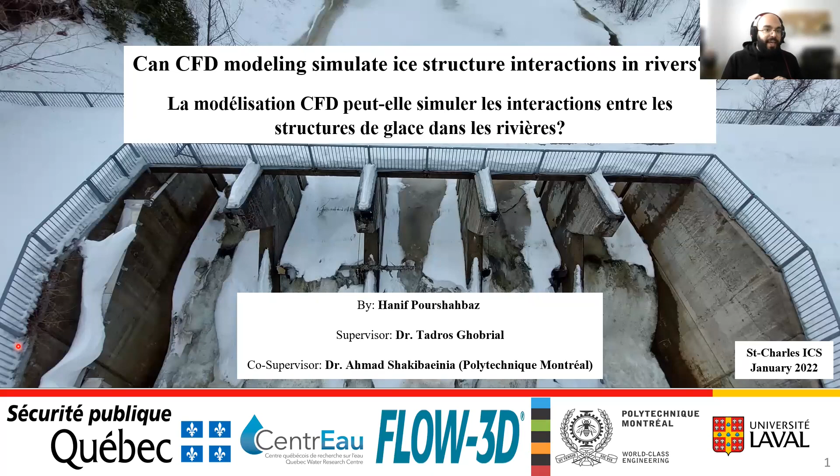Today, I'm going to talk about a question: can CFD modeling simulate the ice structure interactions in the river? Actually, it's a question within a bigger project, my PhD, which is the evaluation of the effectiveness and applicability of ice control structures for flood management. This work is supervised by Dr. Tadros Ghobrial from Université Laval and Dr. Ahmad Shakibaeinia from Polytechnique Montreal.

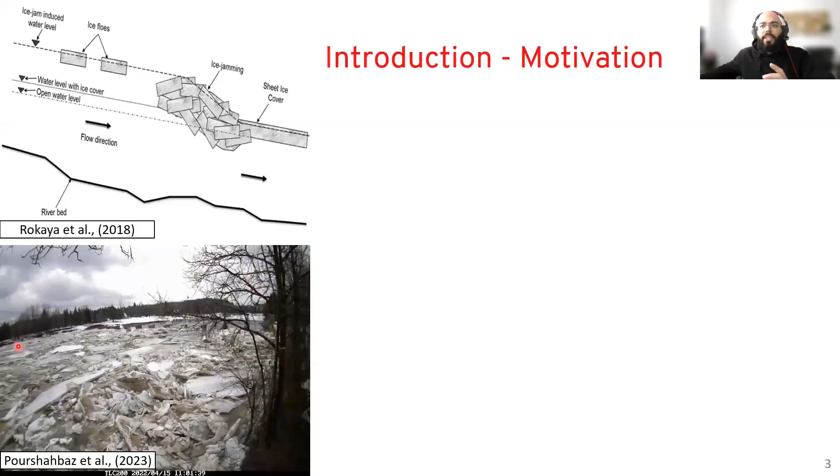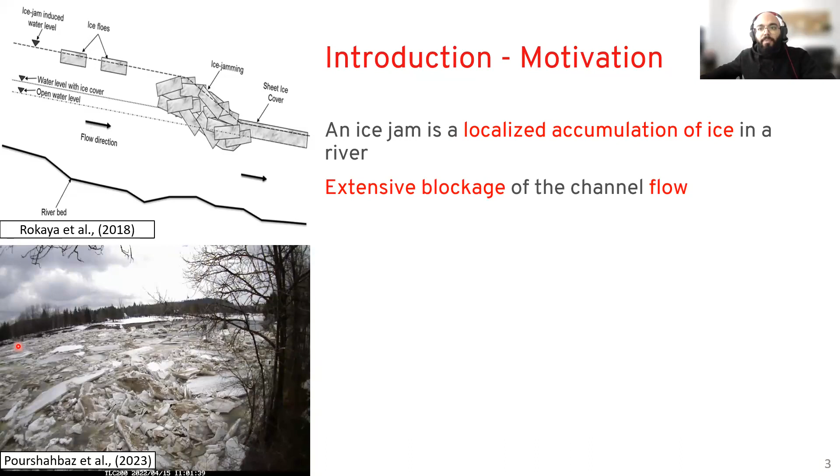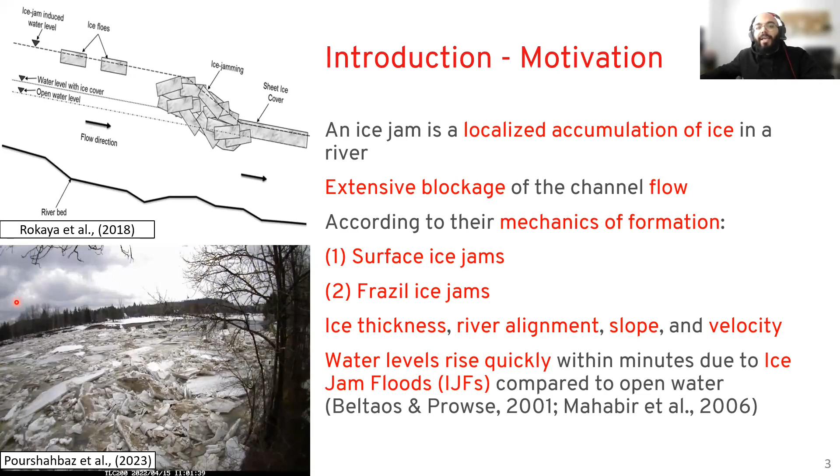Actually, ice thickness, river alignment, slopes, and velocity can all contribute to making an ice jam. As the water level rises quickly compared to normal floods, ice jam floods are actually more dangerous. Any river that can form an ice cover has the potential to have an ice jam.

For example, in Canada, in the Athabasca River in Alberta, we had an ice jam in April 2020. Or in Quebec, where I live right now, in the Chaudière River in April 2019, or in the Sainte-Anne in 2020, we had ice jam floods.

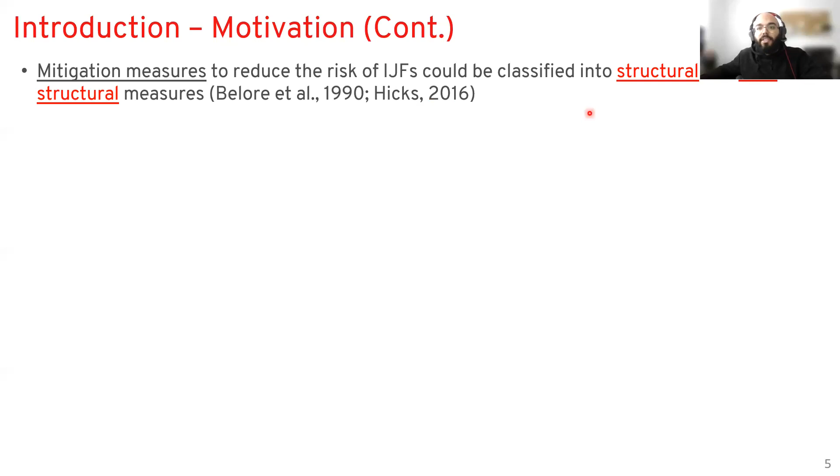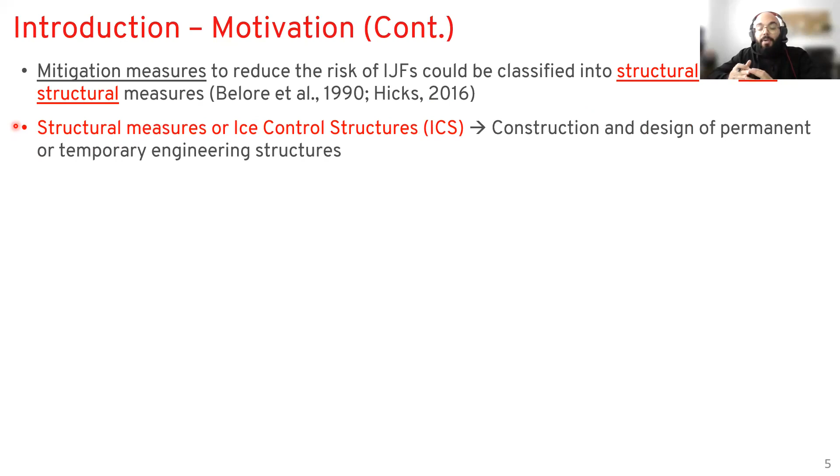So if we want to reduce the damages of ice jam floods, according to Dr. Hicks, we have structural and non-structural measures. Structural measures mean we're going to build an engineering structure on a river.

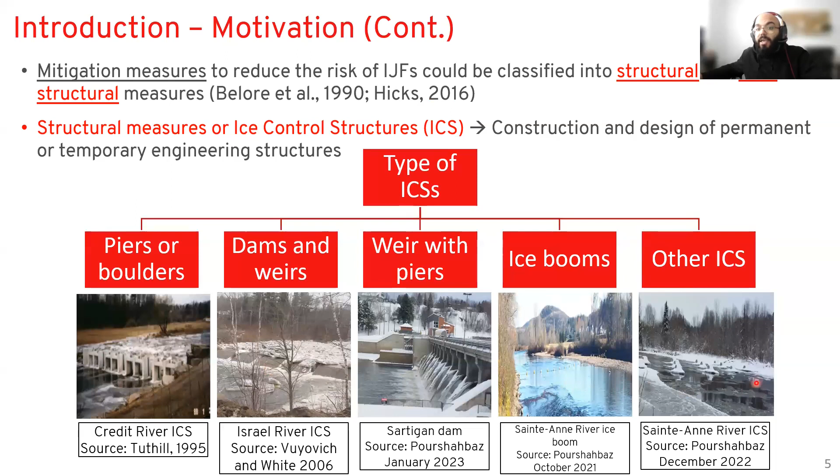We have different types, like piers or boulders, as in the Credit River. We have dams and weirs, like the Israel River. We have weirs and piers, like the Sartigan Dam in Quebec, Saint-Georges. We have ice booms, like in the Sainte-Anne River in Quebec as well. And we have other ice control structures not classified in these categories, like what we have again in the Sainte-Anne River in Quebec.

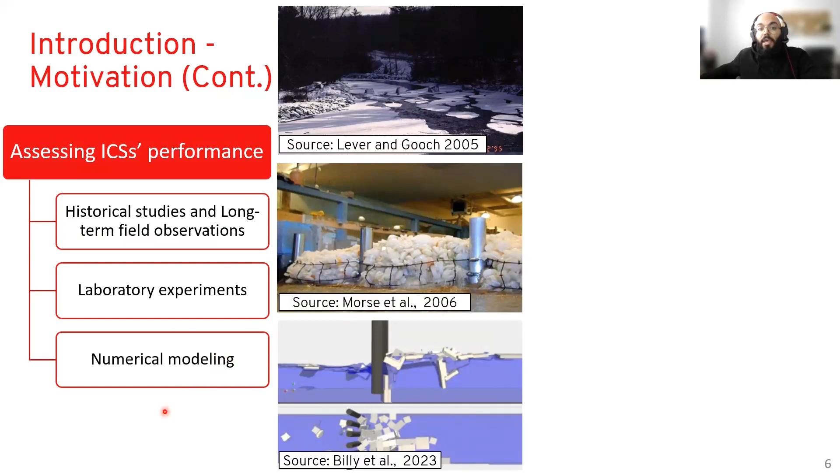So to evaluate whether these ice control structures work correctly, we have three approaches. We have historical study and long-term field observation, like what Lever and Gooch did. We have laboratory experiments, like what Dr. Brian Morse did at Université Laval. Or we have numerical modeling, like Dr. Shakibaeinia's team does at Polytechnique Montreal.

About historical and long-term field observation, we have pros and cons. The pro is that we have real data which we can use to validate our numerical models. But as you know, if you've done any field observation, there are problems with the field because it's dangerous. We can only measure one parameter at a time, accessibility is hard, and we have other problems.

About laboratory experiments, we have very reliable data, but the problem is, as Dr. Shen says, satisfying the scale effect. So what should we do? We go to numerical modeling, but for good numerical modeling we have to combine the advantages of all these methods together.

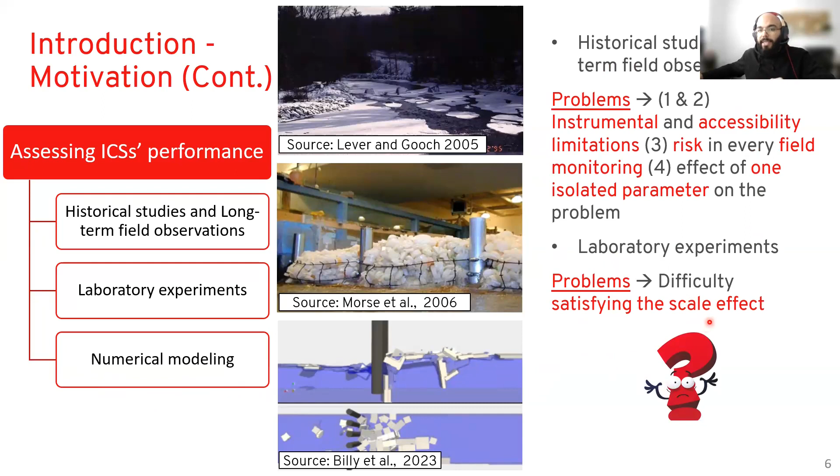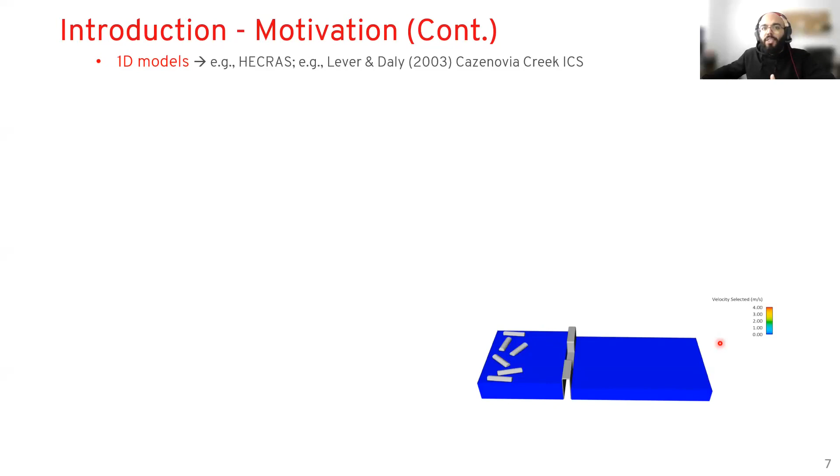So about numerical modeling, we have the 1D model, like HEC-RAS. Most engineers right now use HEC-RAS; it's a 1D model and it works. One of the rarer models is the 2D model, like CRISSP2D, which gives us more data, as Nolin did for a river in Quebec.

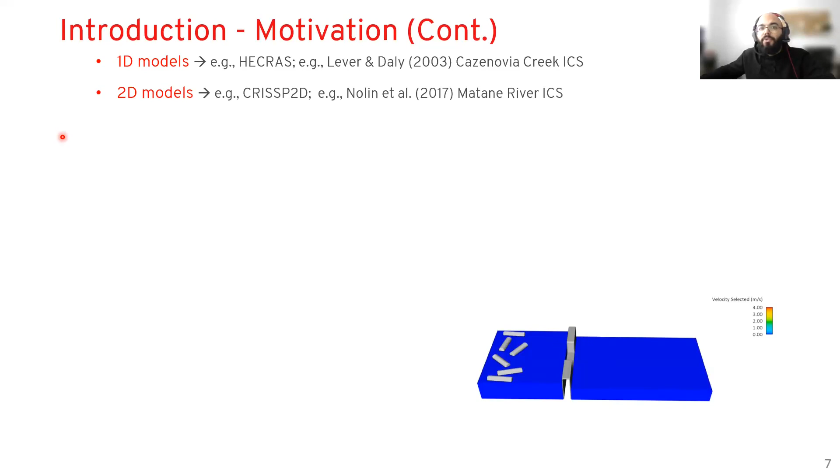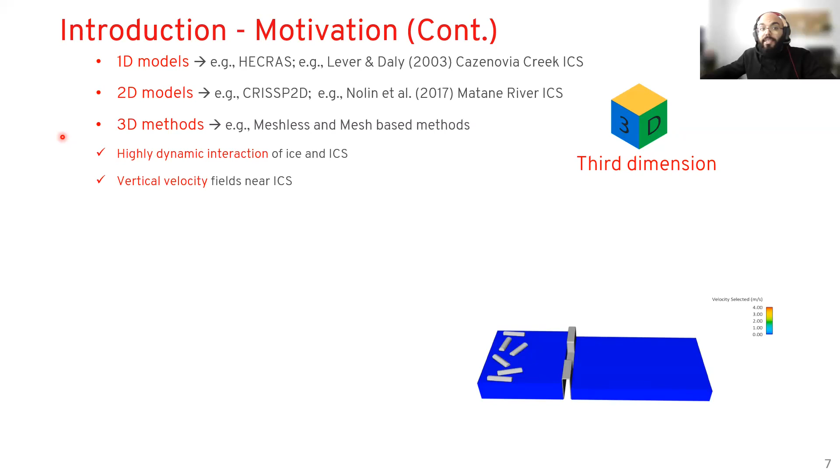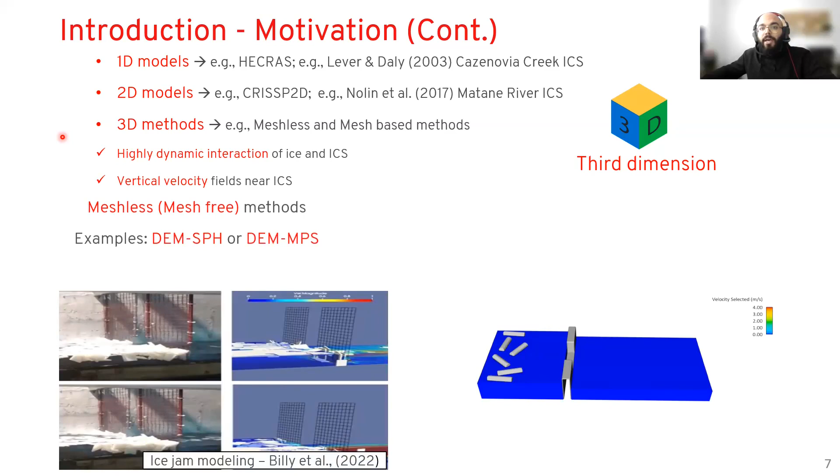For 3D methods, we have meshless or mesh-free methods and mesh-based methods. These help us see the highly dynamic interaction of the ice and the ICS, and the vertical velocities near the ICS. So the question is: should we use a meshless method like DEM-SPH or DEM-MPS, or a mesh-based method like DEM-FVM, finite volume method?

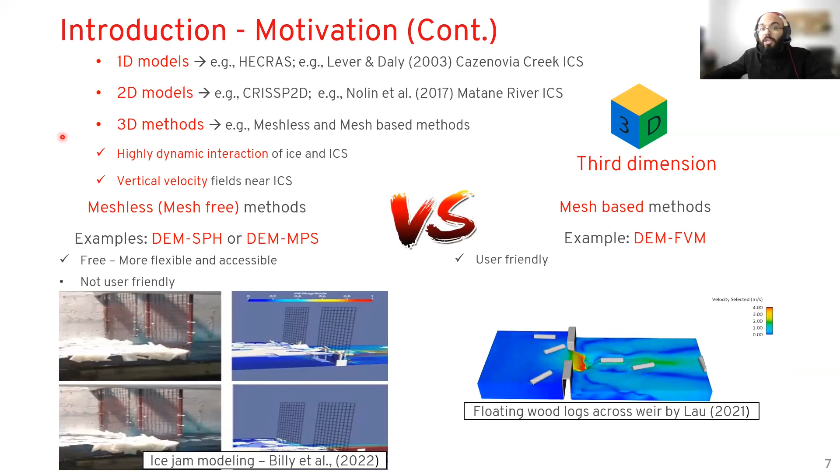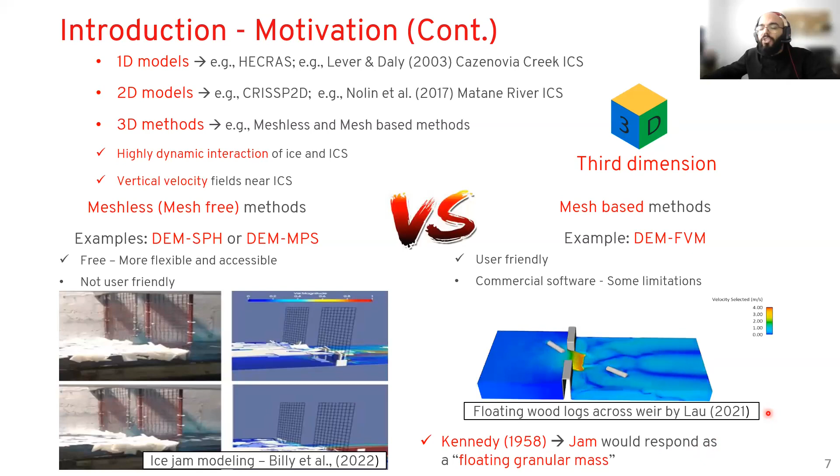The meshless or mesh-free methods are more flexible and accessible, but they are not user-friendly. On the other hand, DEM-FVM, the mesh-based method, is user-friendly, but it's commercial software with some limitations. But when you see a video like that, it reminds you that we can use these models to actually simulate an ice jam with the floating granular mass.

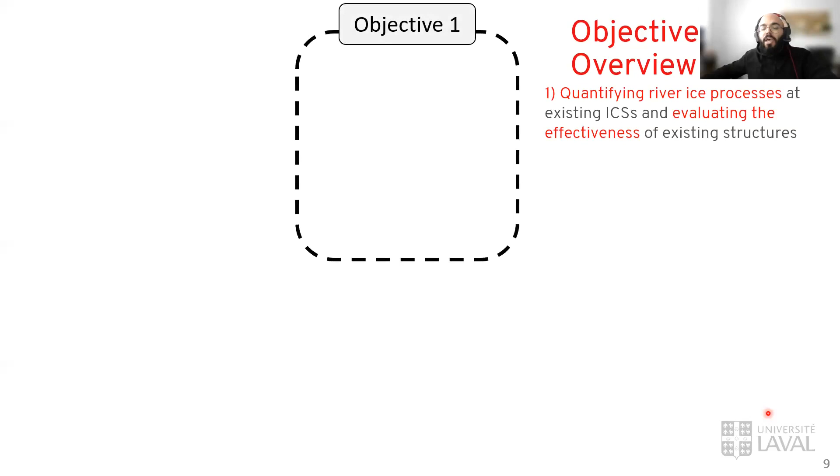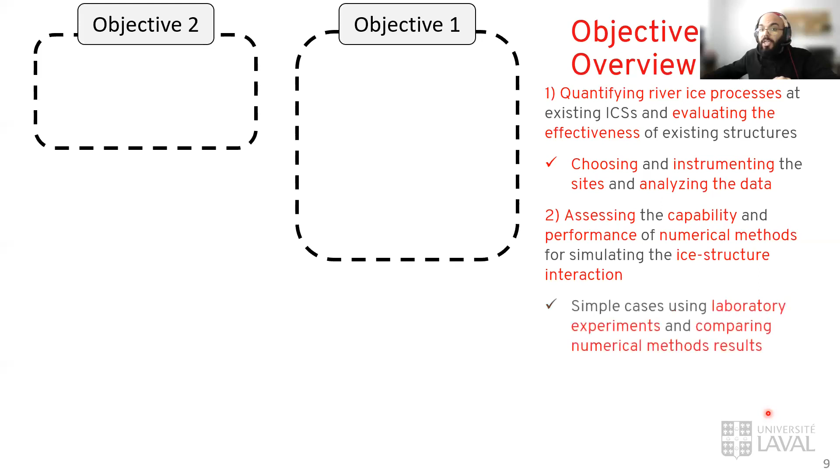So the objective of this presentation - first I'm going to talk about the overall objective of the PhD. In the overall objective, first I have field data, for which I choose instruments and sites. Then I want to talk about the capabilities of numerical methods for simulating the ice structure interaction. And then I want to use the numerical method to optimize the design of the ICSs and maybe introduce new structural measures.

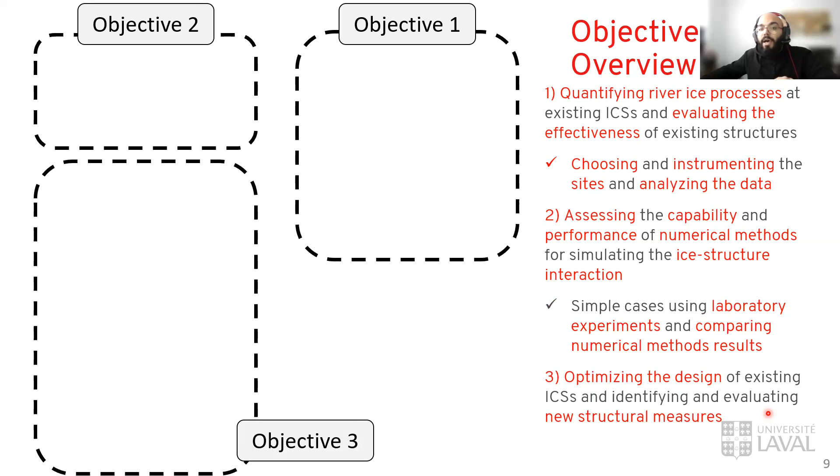So for quantifying the river ice processes, I have field observation 1 and field observation 2, which is winter 2022, 2023.

This is the winter 2021, 2022.

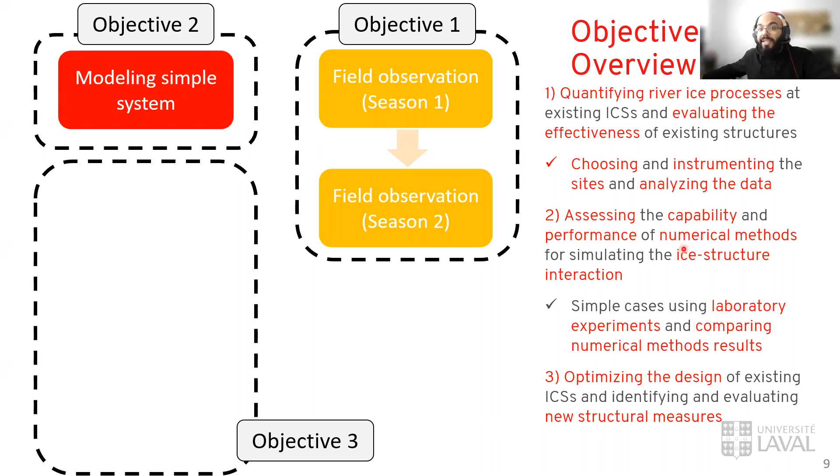We have them modeling the simple systems, where we're assessing the capability of numerical methods and how we're going to connect these together with a calibrated and validated model and the results of the field observation season 2. We're going to use them to model the real life system, then optimize the design and introduce new structural measures. Actually, this part of the project by itself is a master project as well.

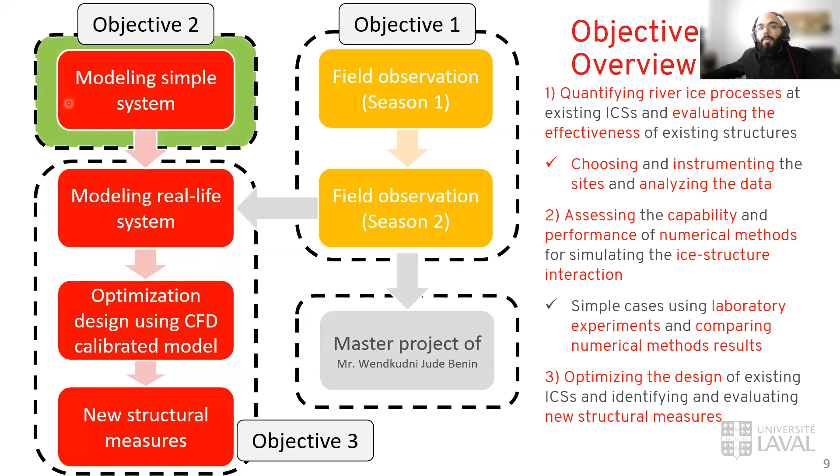In today's presentation, I'm just going to talk about this part of the project, which is modeling the simple system. So I'm going to talk about evaluating a mesh-based method, DEM-FVM, which is actually in FLOW-3D HYDRO, to do the simulation of ice and ice control structures, comparing it with laboratory experiments and other numerical methods.

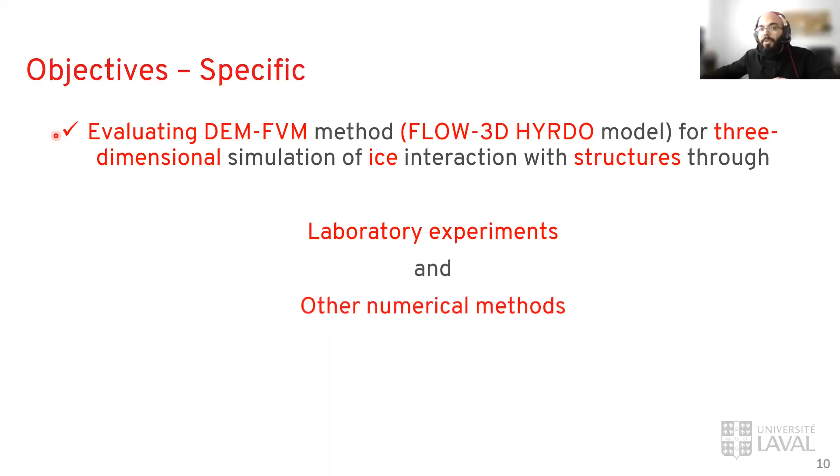For the methodology, as I said, we have the laboratory experiments. The laboratory experiments were actually done at Polytechnique Montreal by Dr. Ahmad Shakibaeinia's team.

In the first laboratory experiment, we have the dam break with 4 and 9 blocks. The blocks are here, the gate opens, these blocks go to the end of the channel, hit the end of the channel, and come back. They have a complex phenomena.

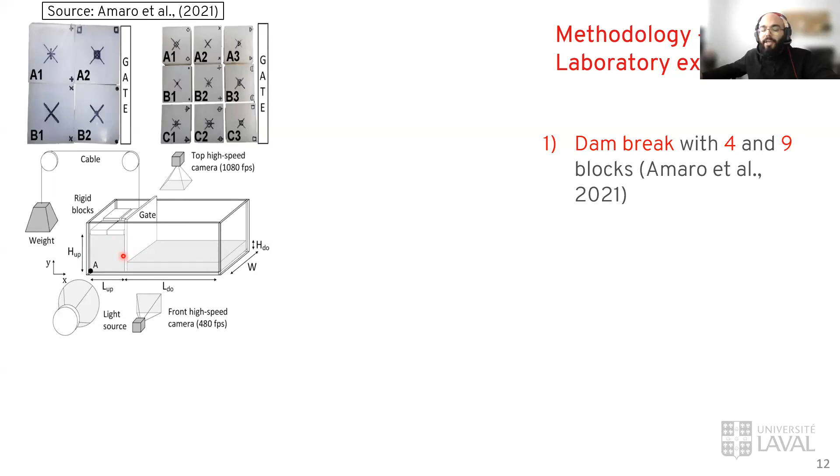Then we add more complex phenomena, which involves 25 blocks, and we add the piers that represent the ice control structures.

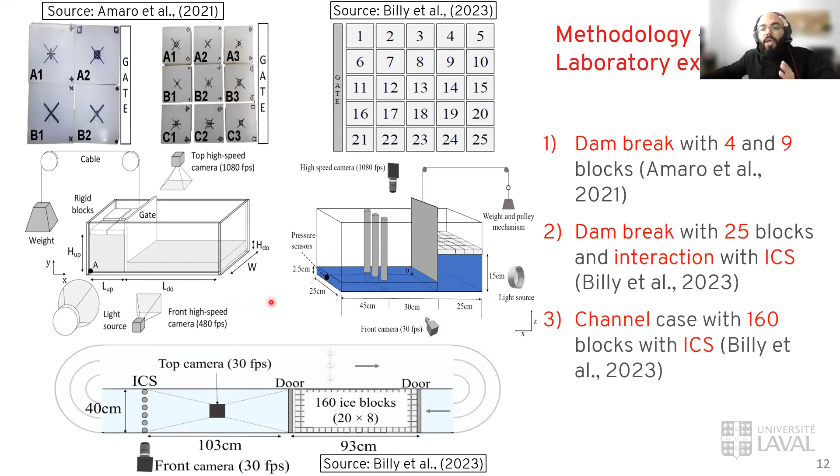Then we add more complexity to the problem. So we bring 160 blocks into a channel along with the ice control structures, which are the piers again. In each step, we try to add more complexity to the problem.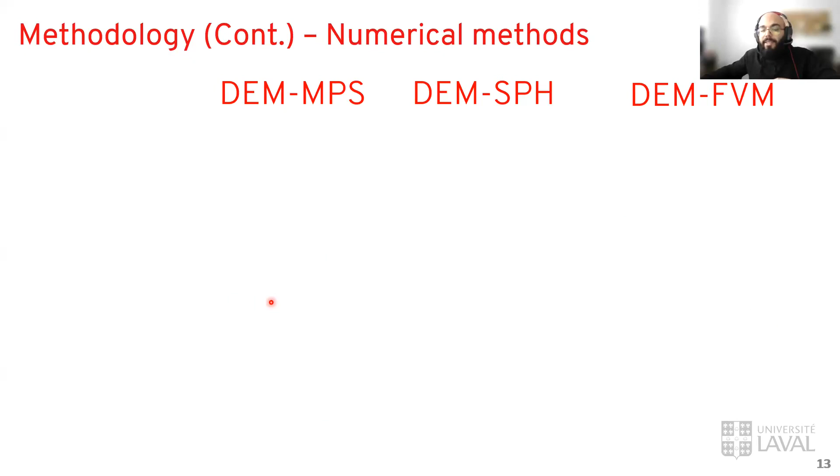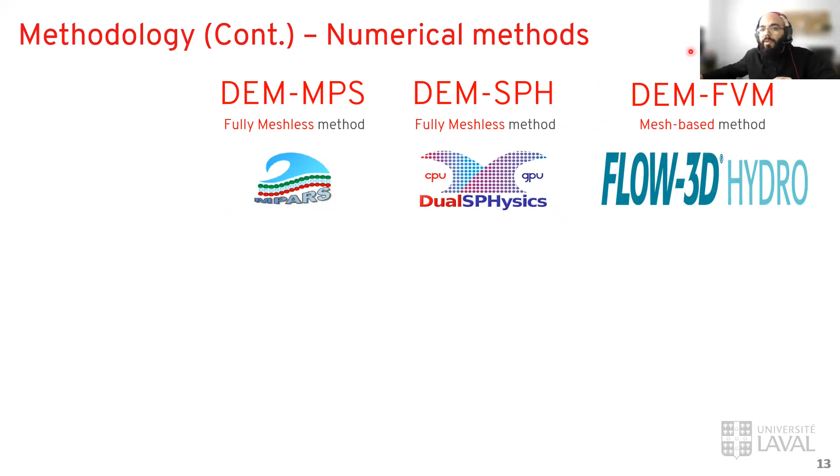For the numerical method, we have DEM-MPS, DEM-SPH, and DEM-FVM. The first two are fully meshless methods, and the other one is the mesh-based method. DEM-MPS is developed by MPARS, DEM-SPH is developed by DualSPHysics, and DEM-FVM is developed by FLOW-3D HYDRO.

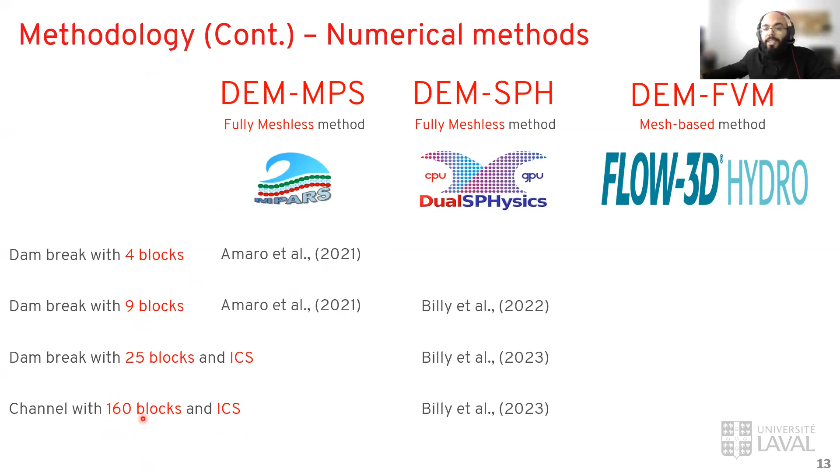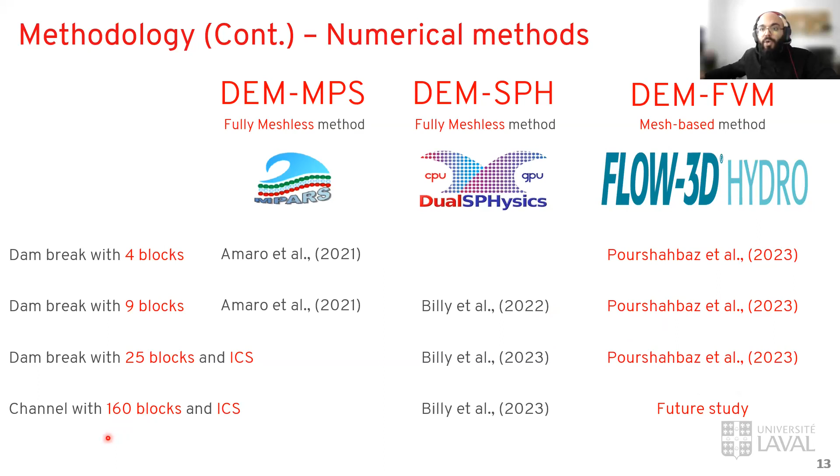So we have these experiments: the dam breaks with 4 and 9 blocks, 25 blocks with ICS, and 160 blocks with ICS. Dr. Shakibaeinia used this method and published a paper in 2021 for the 4 and 9 blocks. Then they moved to using SPH, another meshless method, for the 9 blocks, 25 blocks, and 160 blocks. In my project, I'm using the mesh-based method to make a comparison between the meshless methods, other numerical results, and the laboratory experiments.

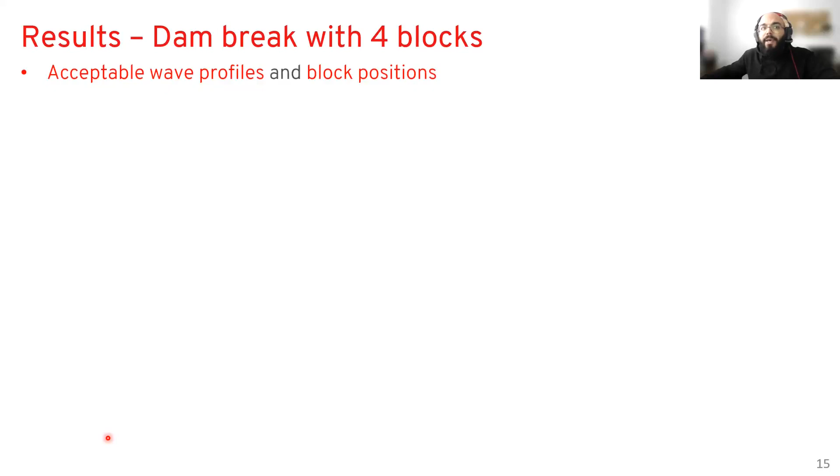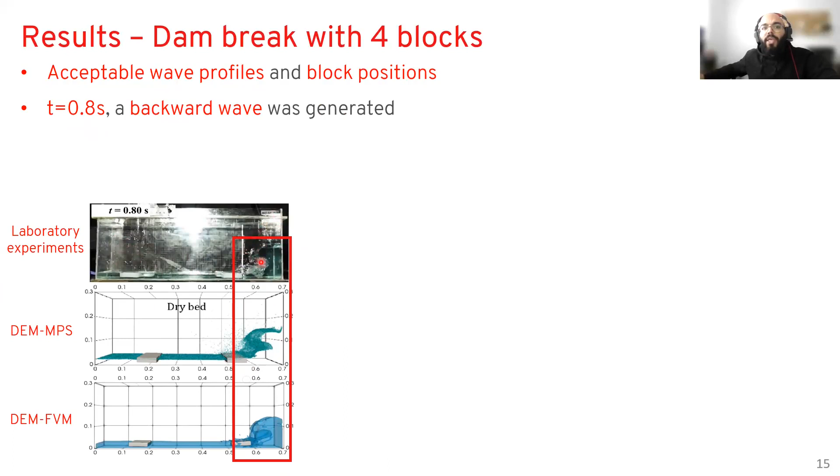So about the results we get from the mesh-based method: first, we have the dam break with 4 blocks. We see that we have an acceptable wave profile and block positioning. For example, at T=0.8 second, we have a backward wave that was generated very well. When the gates open, the water hits the end of the channel and creates a backward wave.

At T=1.6 seconds, we have the reversed wave. So the water hits in here, comes back, and we have a reversed wave that's generated correctly.

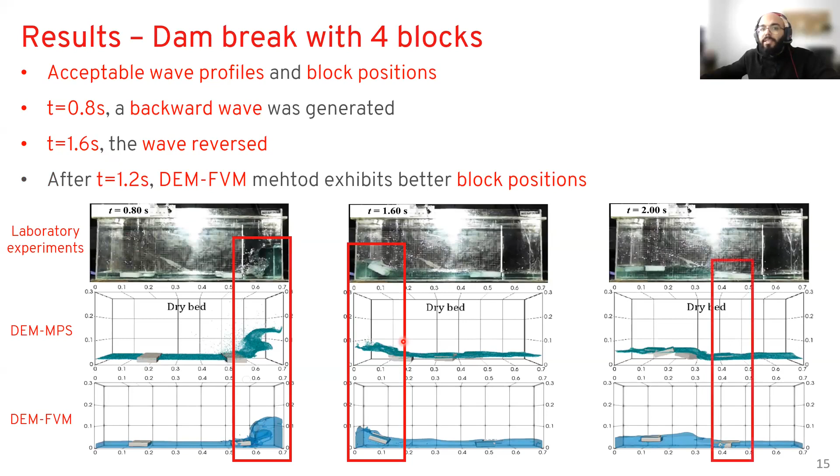But we see that the mesh-based method, DEM-FVM in the FLOW-3D HYDRO model, actually shows better block positioning. One way to see that the numerical method works well in this scenario is to follow the blocks in different directions.

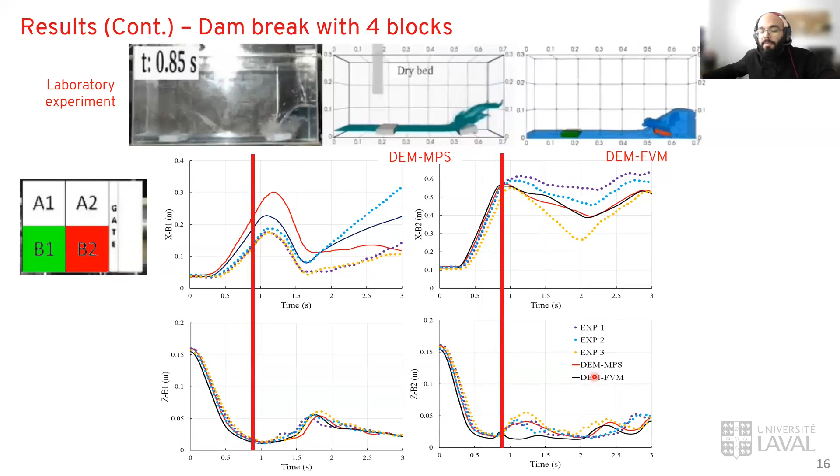Here you can see the three experiments plotted together: the laboratory experiment, the DEM-MPS meshless method, and the DEM-FVM mesh-based method, compared to look at the movement of the blocks against the laboratory experiments and other numerical methods. We see that the profiles of the movement have acceptable results.

And we see that the water surface that is generated also has good results.

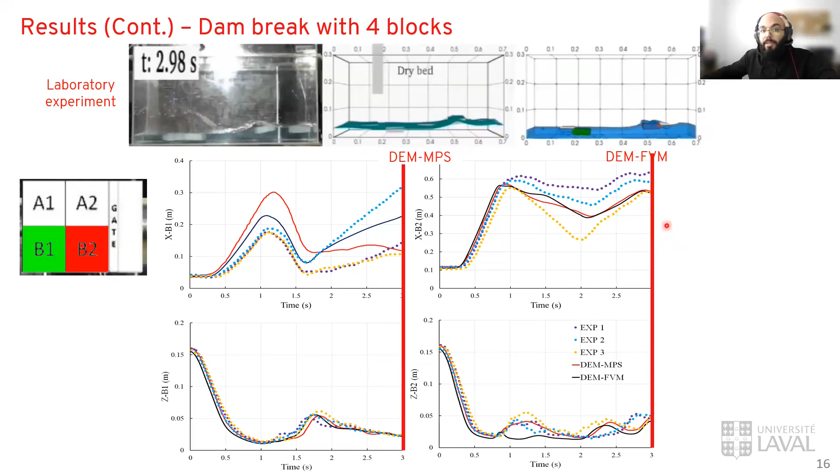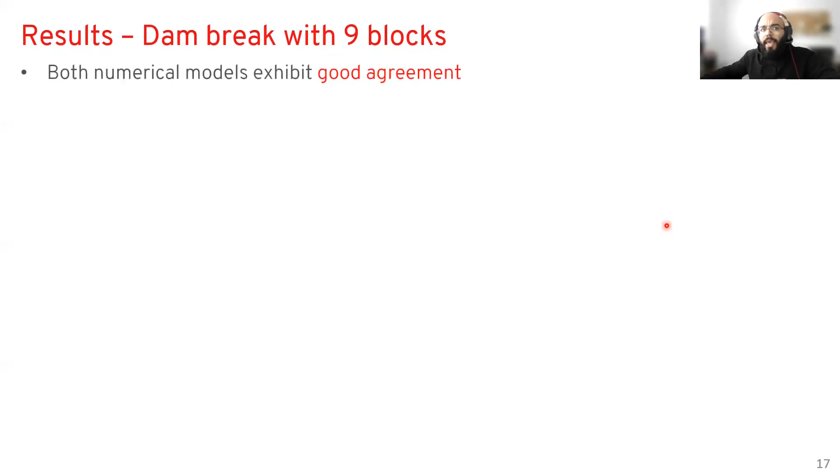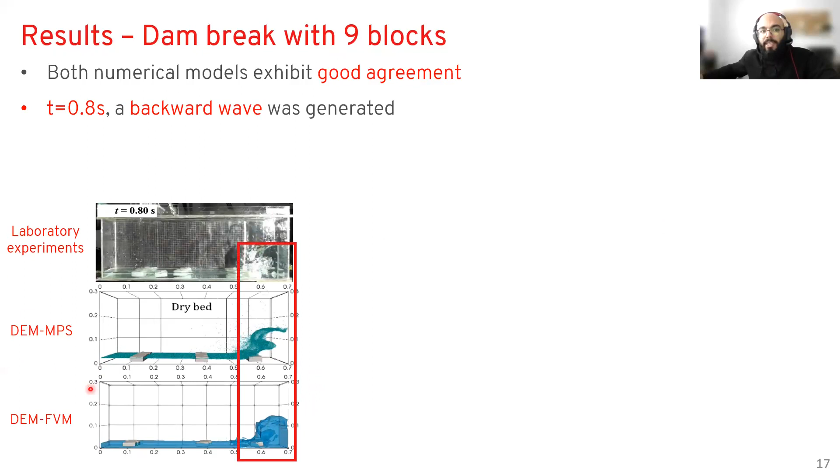So we add more complexity to the problem: we add 9 blocks. Going from 4 blocks to 9 blocks, again we see that the numerical models and methods have good agreement. The backward wave is generated correctly. First we have the laboratory experiment, then the meshless methods, and then the mesh-based method.

Then when this wave hits the water, we have the wave collapse. We see that the wave collapse, shown in the middle images, is generated well.

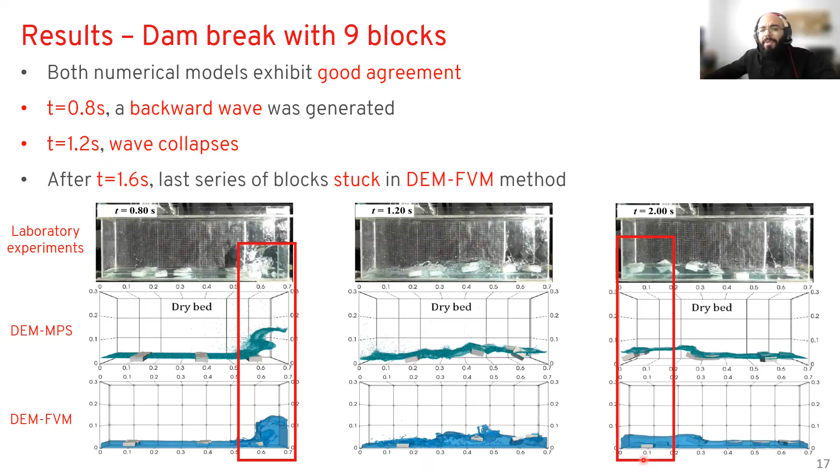After T equals 1.6 seconds, we see that the last blocks in Flow-3D actually got stuck at the bottom of the channel, which may be due to the poor meshing that we used.

We followed the movement of the blocks, C3 and C2, shown in red and green, in the X direction and the Z direction to see if the model works correctly or not.

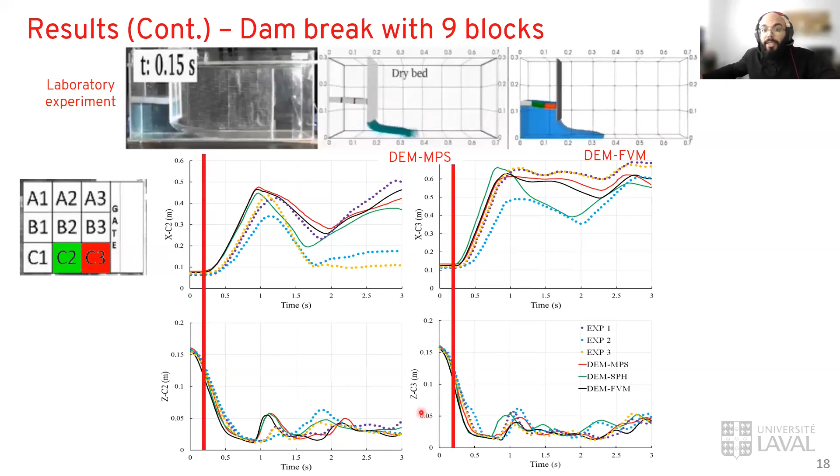Here we have the three experiments again: the dotted line is the meshless method DEM-MPS in red, DEM-SPH in green, and DEM-FVM in black.

One question that may arise is why the laboratory experiments were repeated three times with different data. This is because it's a very complex phenomenon to be sure about the general movement of each block. Actually, the results are very close together.

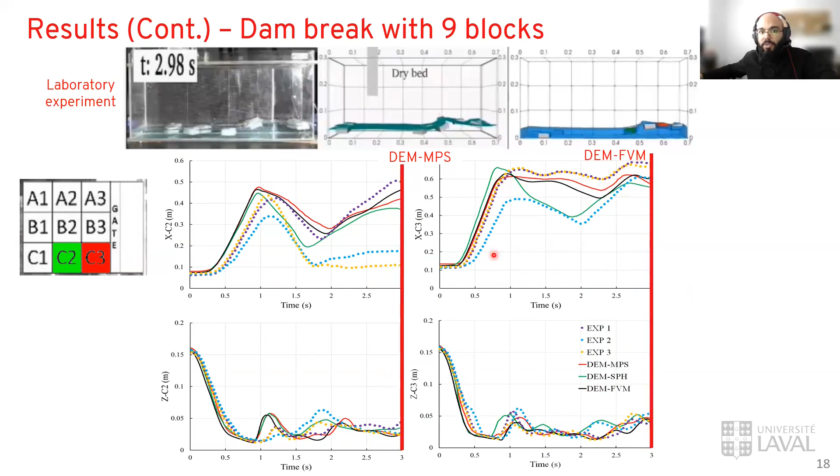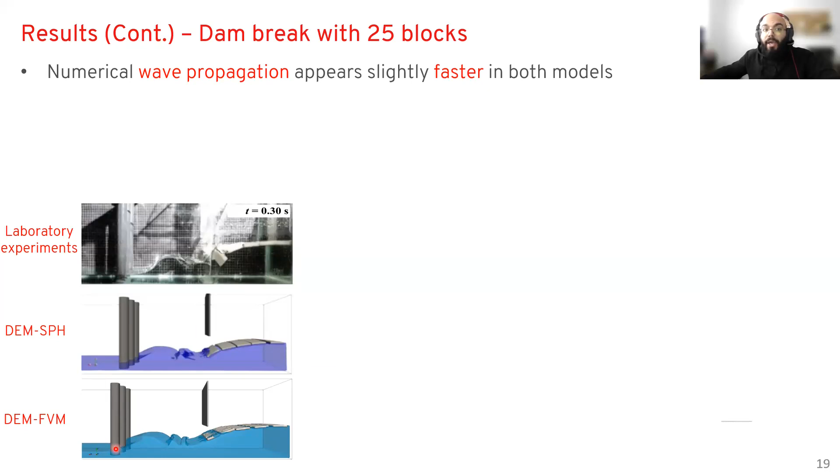We see that the wave generated in the numerical methods was faster than in the laboratory experiments.

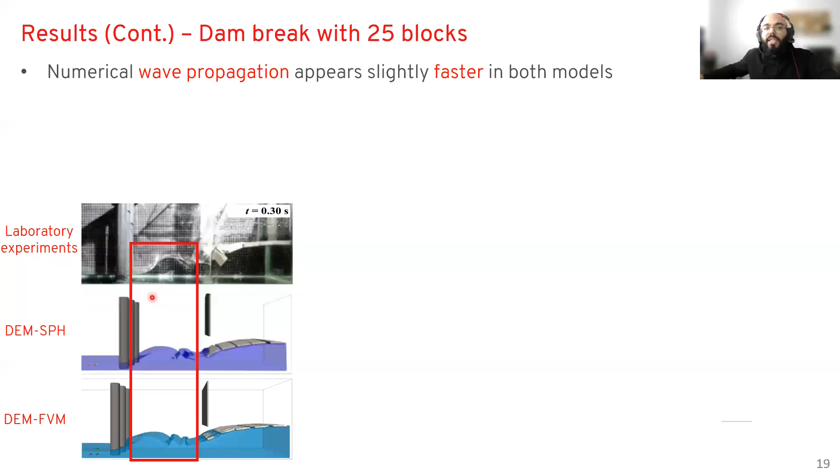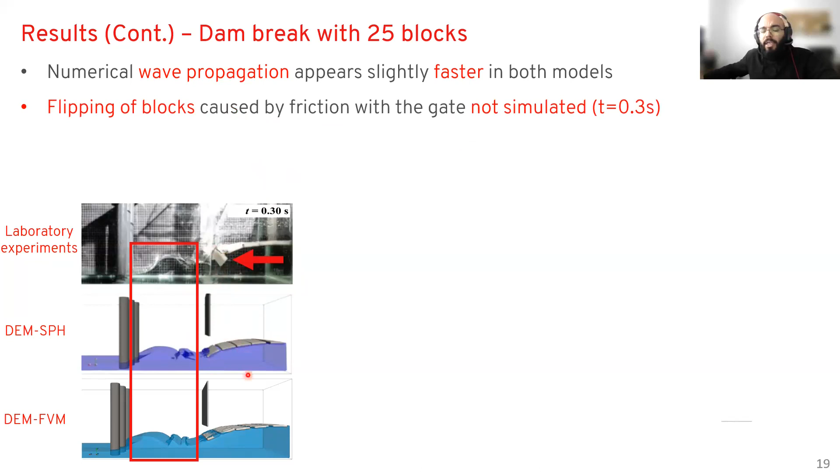We see that some phenomena are not modeled well in the numerical methods. For example, in one experiment we see a block flip over, but none of the numerical methods captured that.

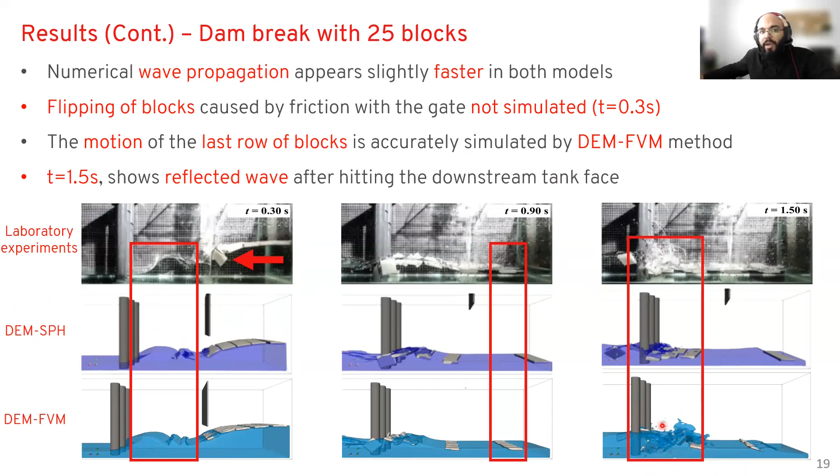The last row of blocks was simulated better by the mesh-based method. We also see the reflected wave that was generated, meaning the gate opened, the water went down the channel, came back, and hit the ice again. Here we have the reflected wave, simulated with good accuracy.

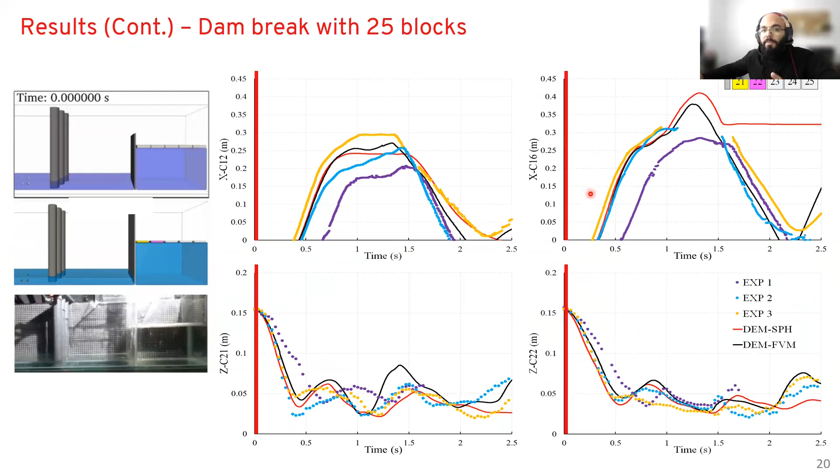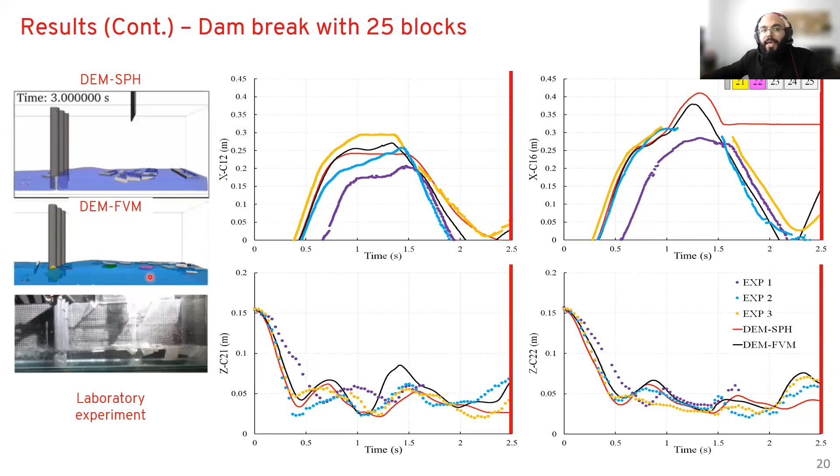Again we examined the movement in the X direction for blocks 12 and 16, and in the Z direction for blocks 21 and 22, to check if the block movements were accurate. We have the laboratory experiment, the meshless method, and the mesh-based method in the middle, showing the movement of the blocks and the results.

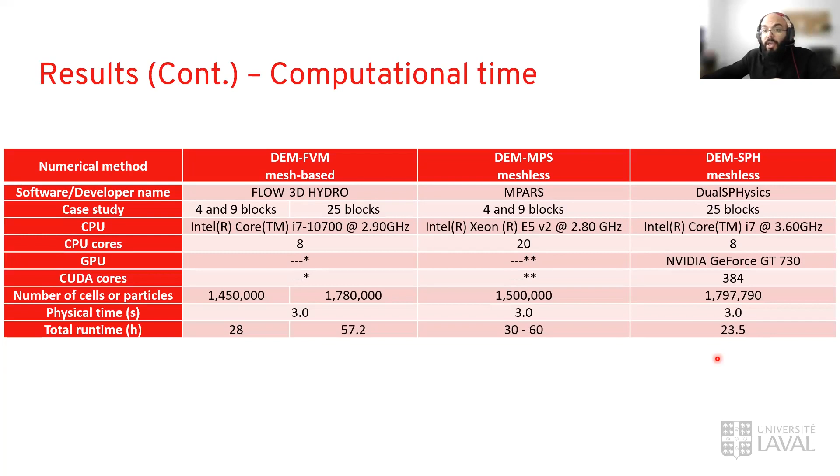For the meshless method, with about 1.5 million particles, we have between 30 to 60 hours of computation time. DEM-SPH, with 25 blocks and about 1.8 million particles, needs about 24 hours of computational time.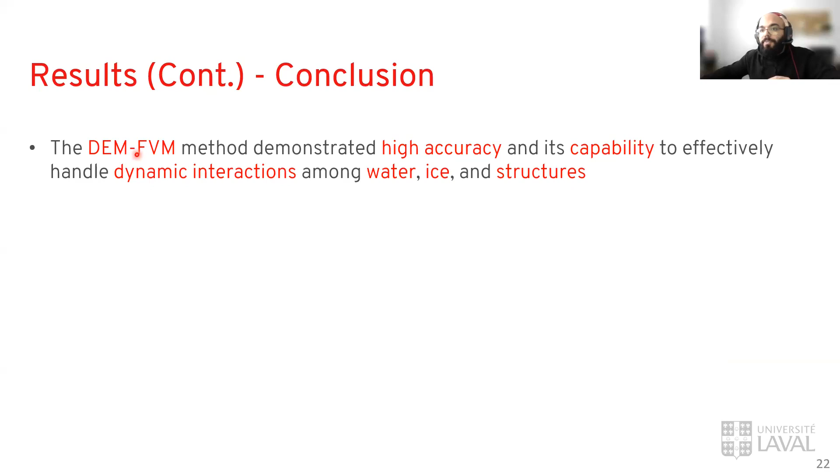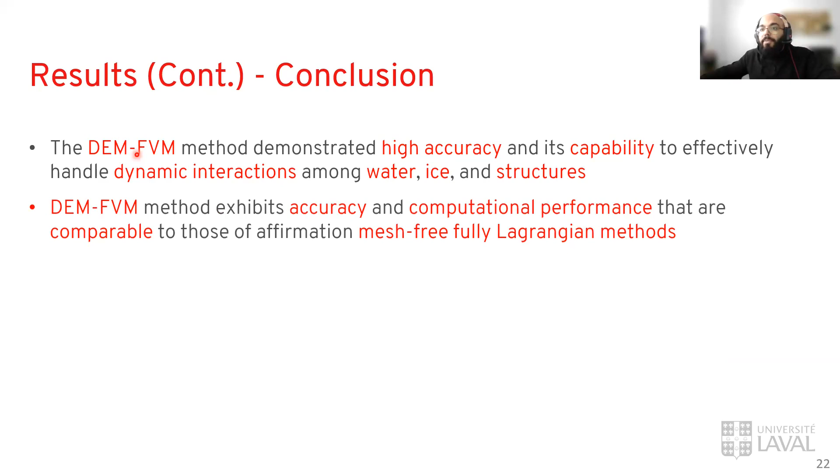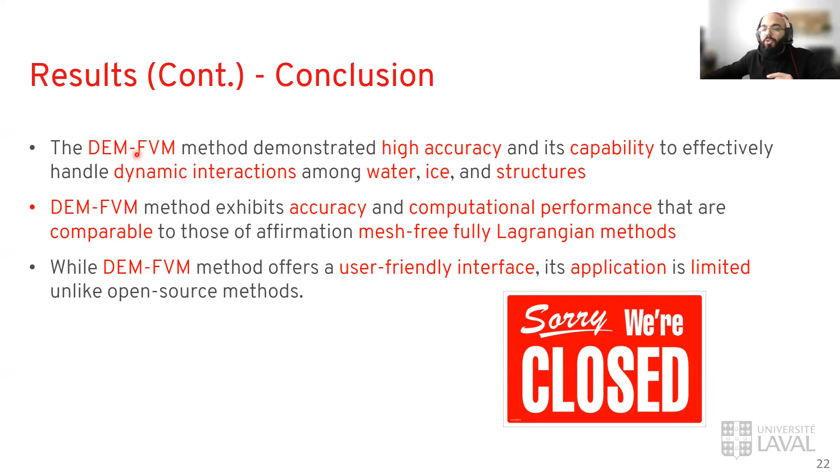In total, the DEM-FVM method, which is implemented in Flow-3D Hydro, shows good accuracy and capability in modeling the interaction of water, ice, and structure, and the results are comparable with the meshless methods. It has a very user-friendly interface, but we have to know that its application is limited compared to the meshless methods, which are open source and easier to handle.

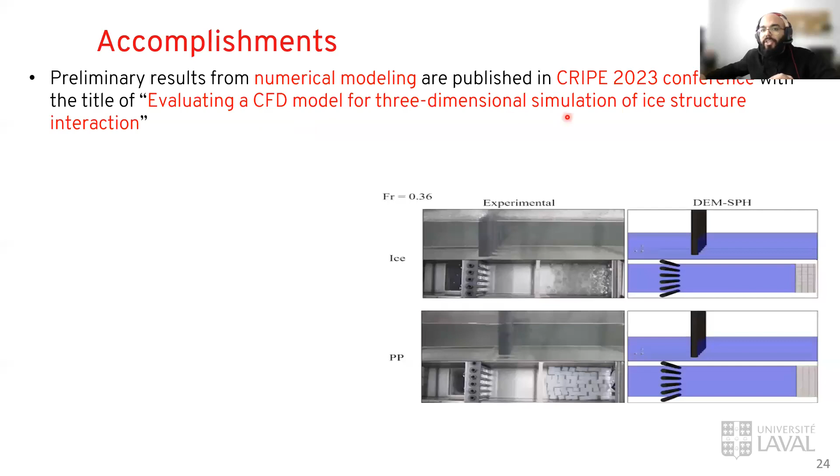Regarding accomplishments, for part one of the work we published a paper titled 'Evaluating a CFD Model for Three-Dimensional Simulation of Ice Structure Interaction' at the CRIPE 2023 conference, which you can find online.

According to the Flow-3D manual, the limitation is 500 objects. I'm currently modeling 160 blocks to face a more challenging scenario and see how it works.

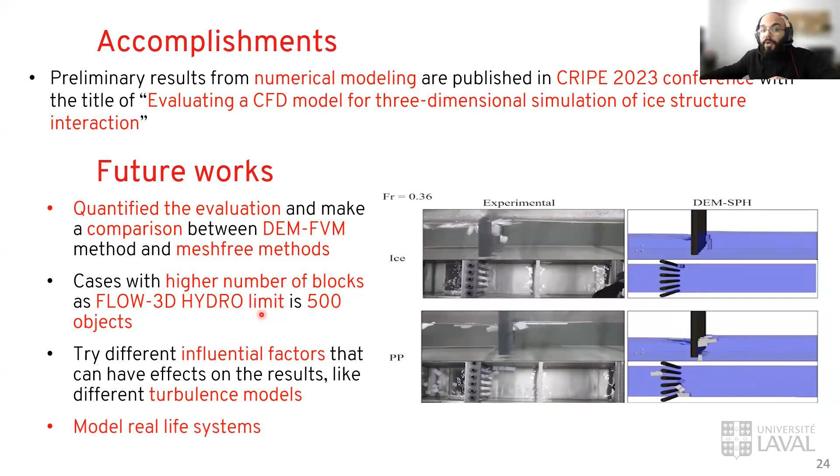We're also going to research other influential factors, like the turbulence model in these simulations, to eventually model a real-life system.